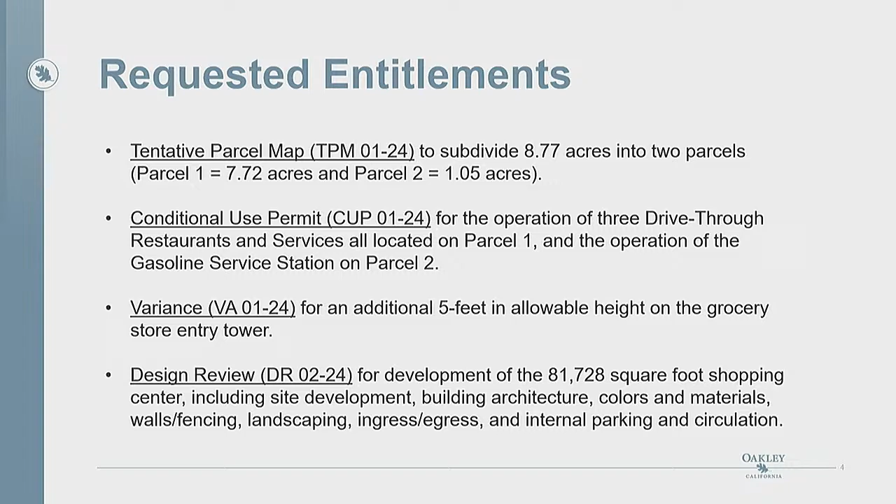The project description, this is just the portion of this presentation, and there you see a rendering of the site with the intersection of Laurel and O'Hara down at the bottom of the picture.

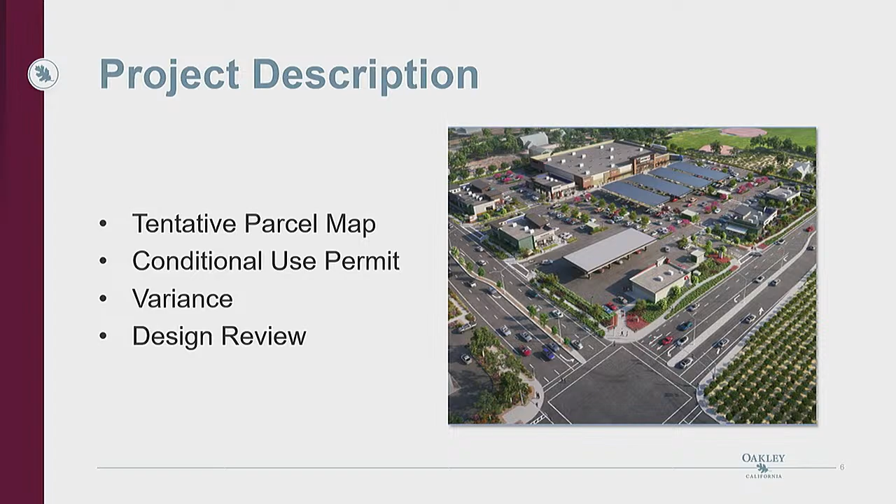So this section, I'll briefly go through what is in the staff report, but in summary detail. So this is the parcel map envisioned. The gray bluish area is where a majority of the shopping center is.

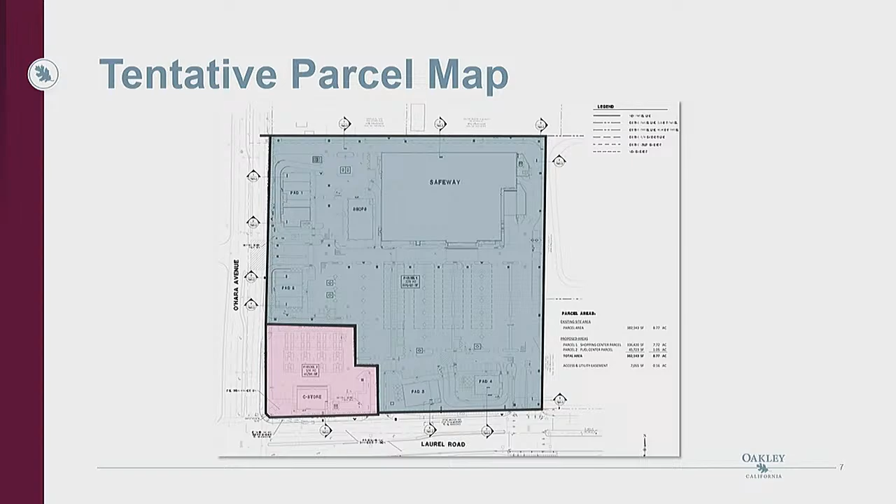The large object on the top is the Safeway store, and the pinkish area is the gas station. And that's how the two parcels would be split up on the site. The bottom left would be the intersection of Laurel and O'Hara.

The conditional use permit covers 3 drive-through restaurants and services. 2 of those are restaurants, located on the top left and the bottom right highlighted area. Those are drive-through restaurants, quick serve. The users are unknown at this time.

The sliver of yellow next to the Safeway would be a drive-up pharmacy attached to the Safeway store. There is 1 gasoline service station in the bottom left. So that's the location of the conditional use permit and the 4 uses associated with it.

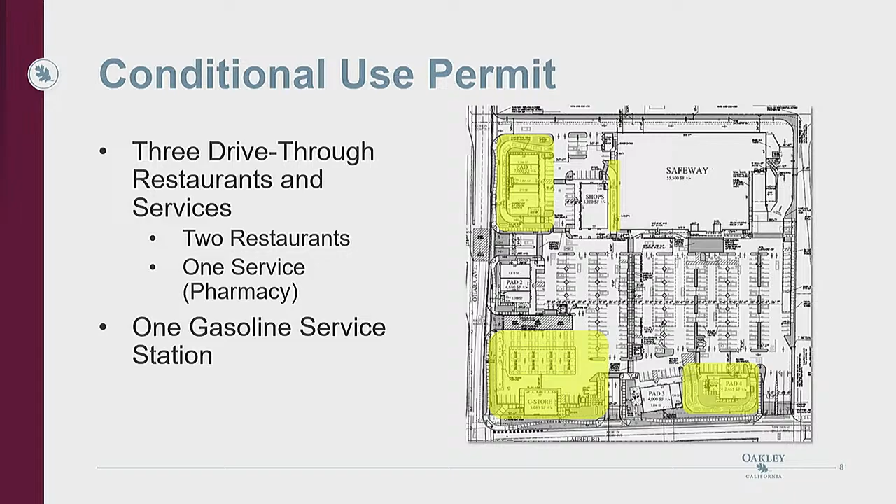The variance is for that exceedance of 5 feet over the maximum 35 feet. And if you can see the tallest section of that Safeway building, that architectural tower in the front exceeds 35 feet by approximately 5 feet.

It's about 80 feet wide, I believe, from side to side. And the rest of the building does not come up to the 35 feet. So the rest of the building is between 29 feet and maybe a little over 30 in some places where the parapet wall extends. So this height variance only applies to that architectural element, and that element only exists at

the front of the storefront. It does not continue all the way to the back.

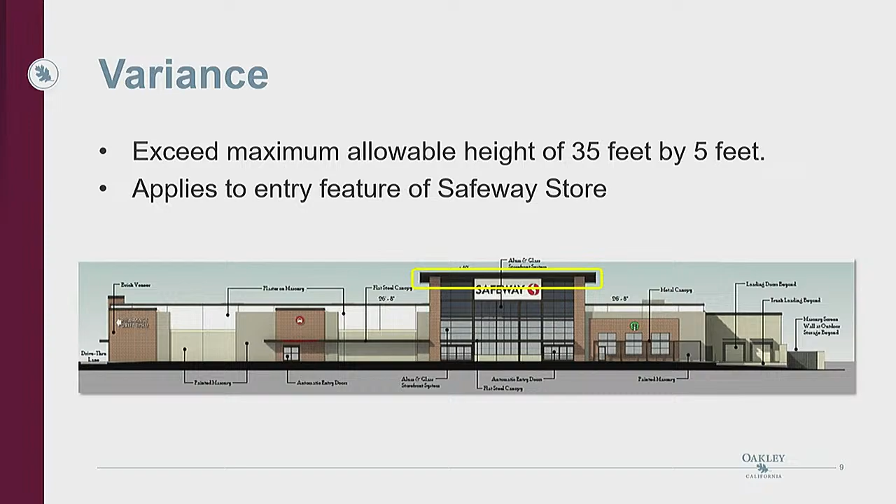Design review, this is just details on the design review. These are the elements that are looked at and analyzed when staff receives a design review application. The top sections are the sort of areas that are looked at: site planning and landscaping plans, proposed architecture, walls and fencing. And the bullet points here provide summaries of all of those elements.

Again, 7 buildings. Some of the other details here, there's over 300 parking spaces, including EV charging stations, 19 bike racks and 3 long-term bike lockers. Over 122 new trees will be planted, several of them large 24-inch box trees. Hundreds of shrubs will be planted.

Full frontage improvement on Laurel and O'Hara, including curb, gutter, sidewalk, and a connection of the sidewalk to the north on O'Hara. Decorative pavement at the drive entrances and pedestrian paths throughout the parking area inside of the project.

The architecture, as you can see in the plans, is quite modern with straight lines. The parapet roofs are used to screen equipment. The exterior consists of a textured exterior with brick veneer. Some of the buildings have horizontal and or vertical panels of different colors.

The storefronts are black metal trim storefronts. And there's a different color and material palette for the Safeway as opposed to the rest of the shopping center, but they use very similar and complementary colors and materials.

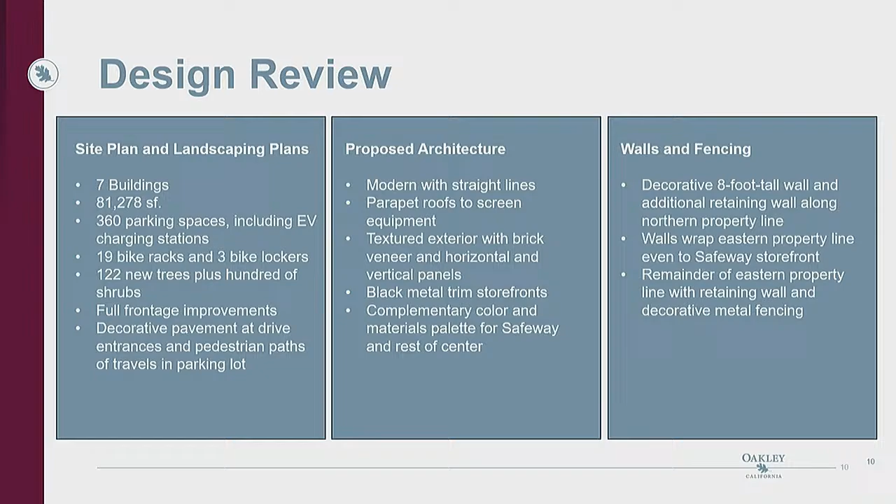There's also solar carports, and this kind of factors into the request for the variance on height. And those are in front of the Safeway store. They cover approximately 120 parking spaces, including 9 Americans with Disabilities Act spaces, and they have a maximum height of

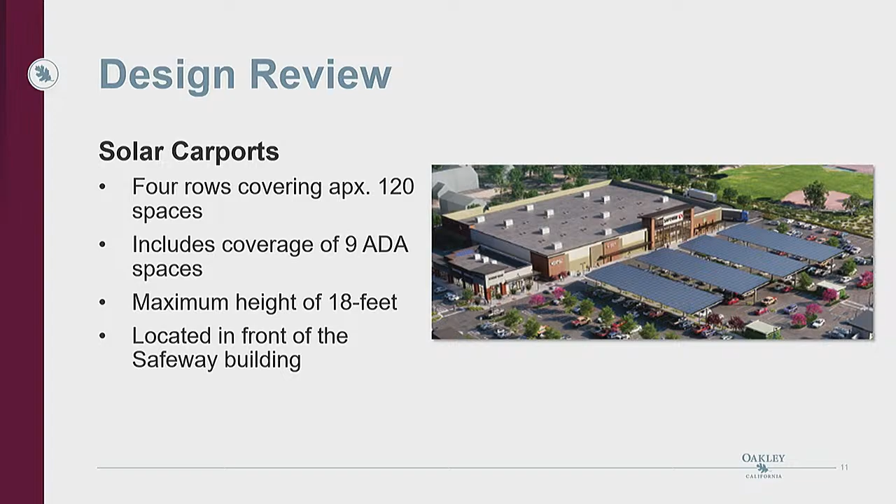18 feet. They range from about 14 feet of clearance on the low side to a maximum of 18 feet to the top on the high side. And again, they're located along the rows in front of the Safeway building.

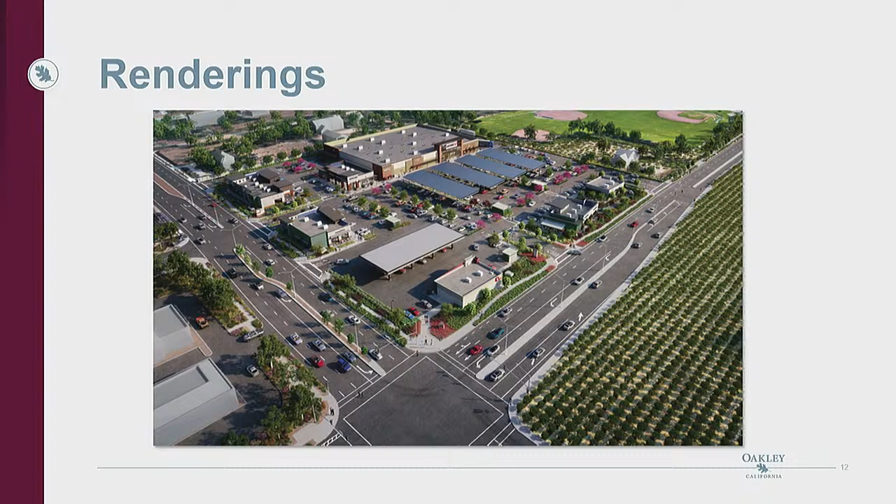This section, I'm just going to go through the renderings that were submitted by the applicant. This is an aerial looking to the northeast. This is a rendering of the entrance driveway that would be off of Laurel Road.

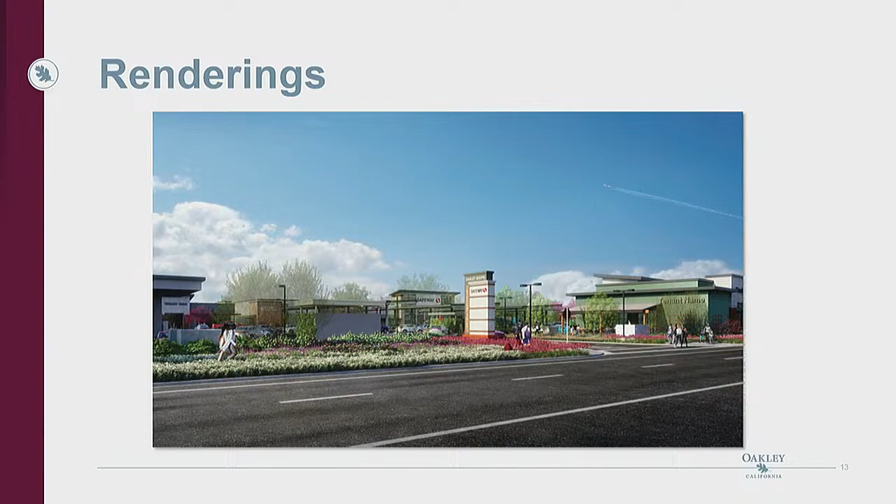So the gas station would kind of be just off the left of the site there, of the picture. These are renderings of some of the interior buildings.

I did review this, and I knew which one this was, but I can no longer tell you which one this was. As you can see, I'll go back to this one. As an example of the stamped asphalt and pedestrian paths, you can see sort of an idea of what that would look like where that person is crossing there.

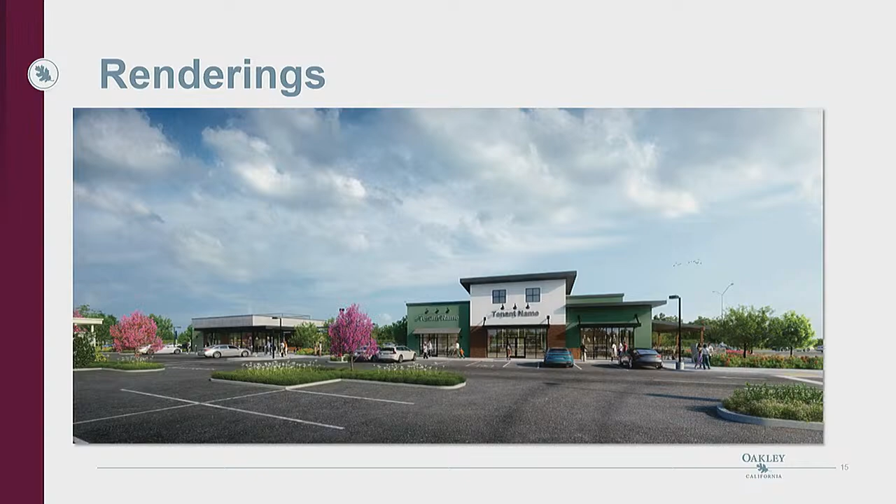And those would be throughout the development. More renderings of the pad buildings. So you can see some of the buildings use a green body color. It's not on all of them, so it's on a few of them and more predominantly on one of them.

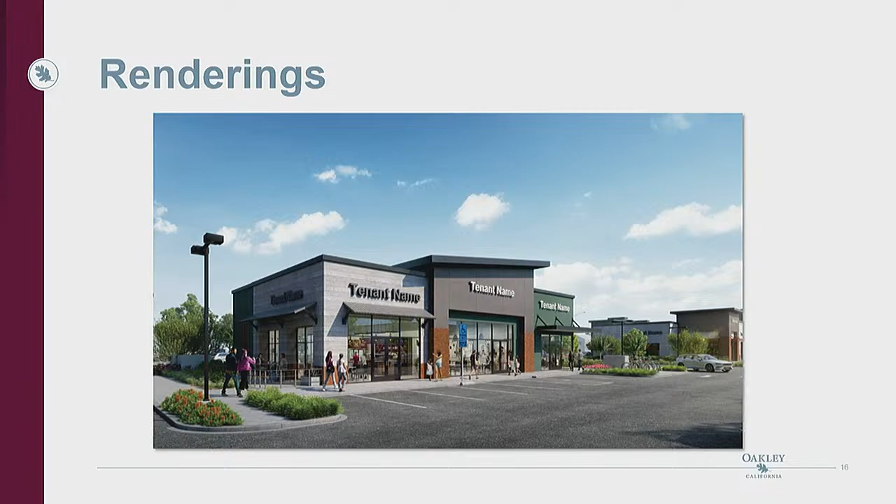And then this one is looking down the frontage of the building adjacent to the Safeway, and then the Safeway in the background there. So this is kind of from the driveway, one of the driveways off of O'Hara.

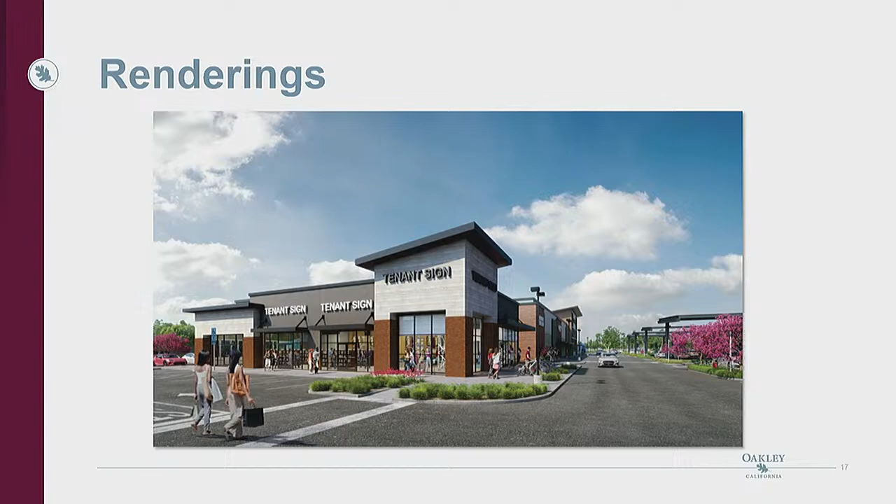With that, we move on to the environmental review for the project. The project was subject to the California Environmental Quality Act. Planning and Management conducted an initial study and determined that the project would fall under a mitigated negative declaration.

The city posted a notice of intent to adopt the MND with the Contra Costa County Clerk and the State Clearinghouse with the Governor's Office of Planning and Research. We also posted the site with that, and we put it on all of the areas around town where we post our agendas and public hearing notices.

The initial study, mitigated negative declaration, resulted in mitigation measures in 8 of the 21 impact categories, and those are included in the mitigation monitoring program that is attached as Exhibit A to the proposed resolution. Those are requirements for the project to implement.

The other portion of the environmental review is for the Habitat Conservation Plan / Natural Communities Conservation Plan. This project is subject to that plan, of which the city of Oakley is a participant. It requires that a planning survey report be submitted.

This report just goes over some of the details of the project site, what type of land cover it has, and then it assumes presence of certain species. Prior to any land disturbance, pre-construction surveys are conducted, and the city collects impact fees associated with this, which are then transferred to the HCP Conservancy, which uses those fees to protect, build, and maintain land, usually outside the urban limit line, for species of concern.

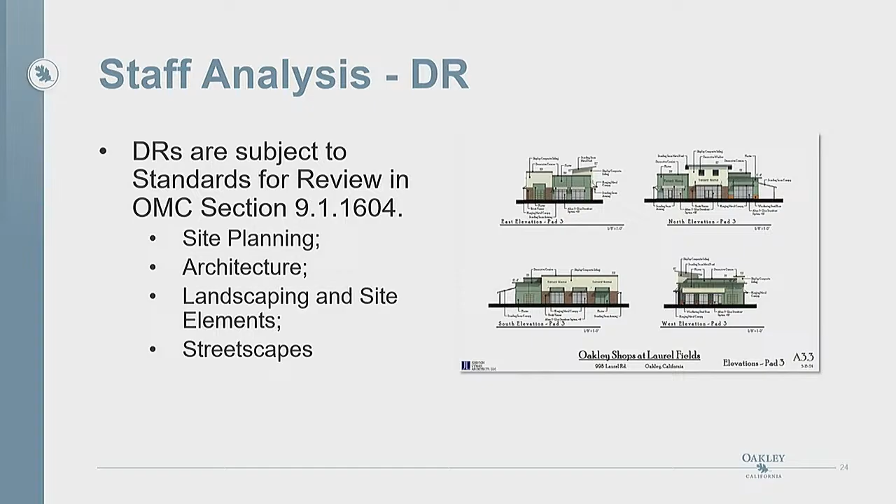For the design review, there are standards of review, and we went over those sections, if you remember, on that previous slide and some of the details of each of the submitted plans. The plans meet the design review standards for review with minimal need for additional conditions of approval.

These are 2 examples of conditions of approval that were added. The 8-foot tall walls conditioned to be decorative, not consist of a smooth-faced concrete-colored material. In other words, it just shouldn't look like smooth concrete. Detailed exterior lighting designs will be required of building permit plans. We do have some of those lights called out now, so we'll just be asking for additional spec sheets and details.

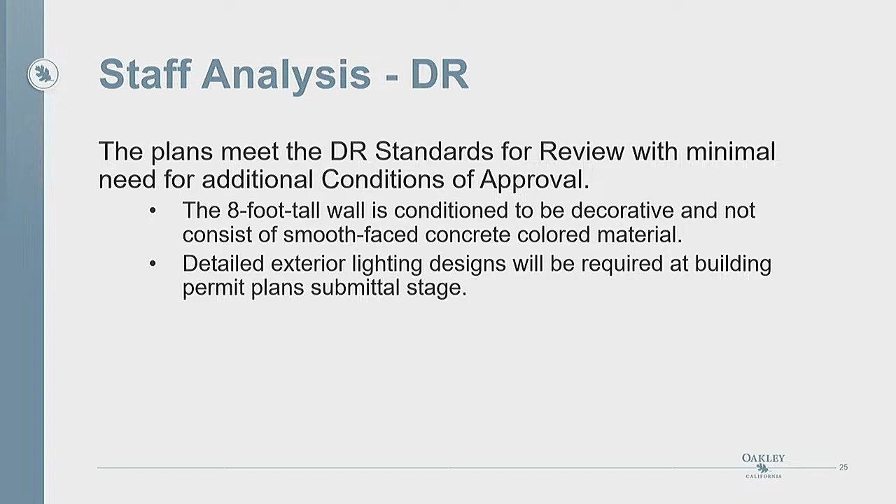So with that said, all required findings are included in the proposed resolution, attachment 5 to the staff report, and they're found on pages 2 through 7. I think the very top of 7 is the last finding.

There's one very small correction to the staff report. A part on page 6 reads that the variance is subject to conditional use permit standards. Obviously, that should say variance standards. All the included standards in the staff report are accurate, it's just how it was described there.

The city did receive public comments on this project in written form. We received a letter from Contra Costa Environmental Health. They were kind enough to list out a bunch of items that the businesses they suspect would be occupying the site would be subject to. That'll be passed on to the applicant and future operators of the center, should it be approved.

We received an email from Mr. Joe Sabrante, representing a neighbor north of the Safeway store, requesting split-face CMU or similar materials for the sound wall, requesting lighting along the northern property not spill into adjacent residential properties, requesting restricting delivery semi-truck speeds behind Safeway to minimize noise on neighbors and reduce backup alarm usage after hours. He also wanted the operators to be considerate of noise created by hours of trash pickup.